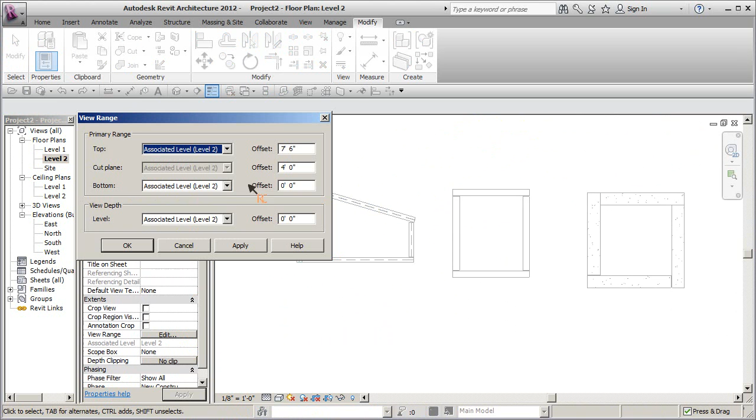So I'm going to go up to my second floor. Probably change my view range here to say unlimited. That way I'll be able to see down a little bit farther. Now what we do is we start our tool here, and as soon as we do, we'll see some options on the options bar here.

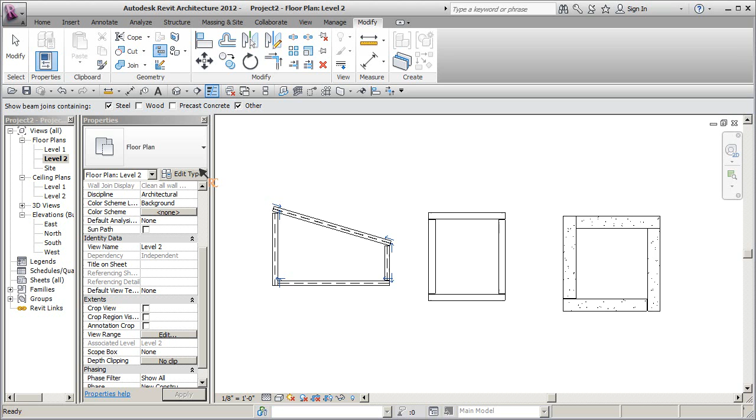And what it says is, show me the steel beam connections, the wood beam connections, and the precast. So if I go over here and I say, okay, I don't want to see the precast or the wood, it just won't show it to me. Now that I'm looking at the steel ones, when you zoom in, this one's being cut back, this one is not.

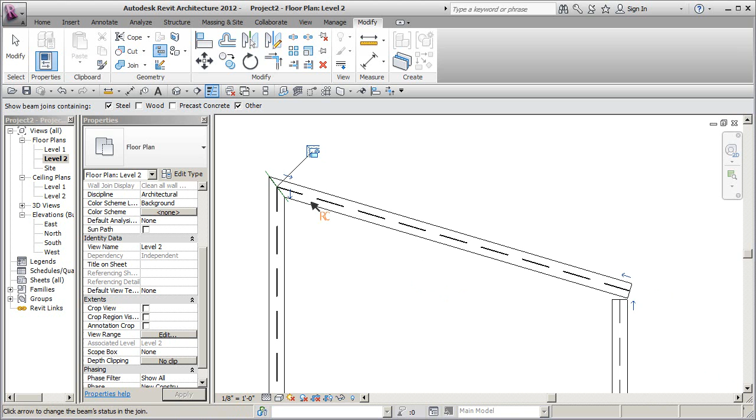So watch what happens when you flip this and it goes in there. Now they're both going away from the joint. Okay, and that's when you get your miter cut. You can basically take these two guys and form whichever connection you want. It's pretty straightforward. This one, if you bring that one back, it cuts back.

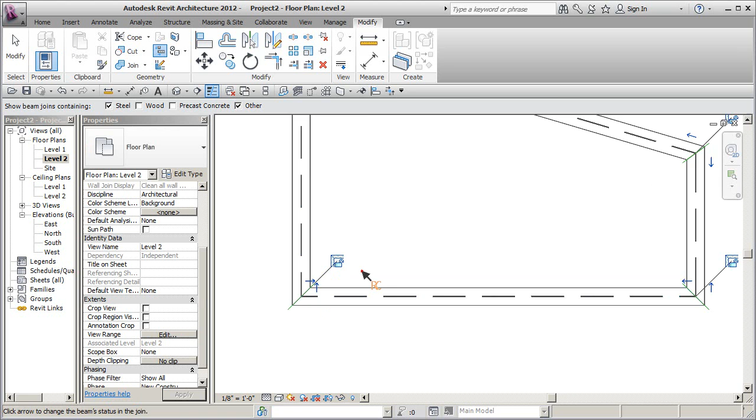If you bring this one in, it goes forward. If you bring them both in, then they form your miter joint. So you can basically go through and form whatever you want. This one's going away. This one needs to flip like this. Now we can say, okay, I only want to see the wood ones, not the steel ones. There's my wood ones. Same type of thing.

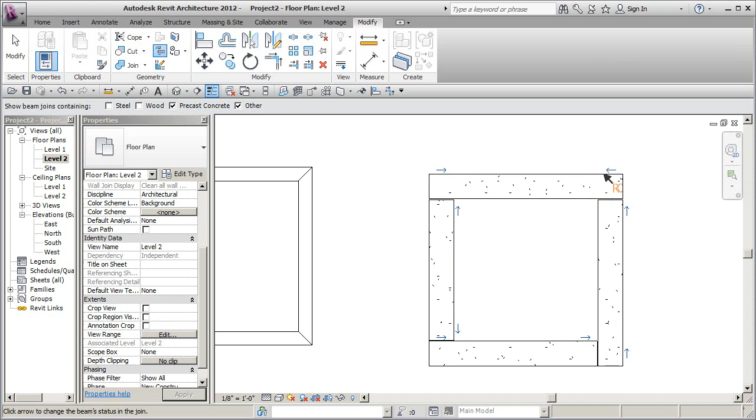It's up to you. It's a little flip arrow, very straightforward, forming those. Precast, maybe we'll leave our precast just like that. Turn the visibility on. Maybe we just want to flip them the other way, just for the halibut. Okay, very straightforward, nothing too fancy. So keep an eye on your options bar here as usual.

And this is a tool specifically for where steel, wood, and precast beams start to come together. Others probably custom families or something. To clear it, escaping doesn't seem to do it all the time. So if you're not sure, hit modify. Clicking Modify here is like doing 3 escapes or so. It's kind of the mothership of clearing your selection and command. So click the modify button and it all goes back.

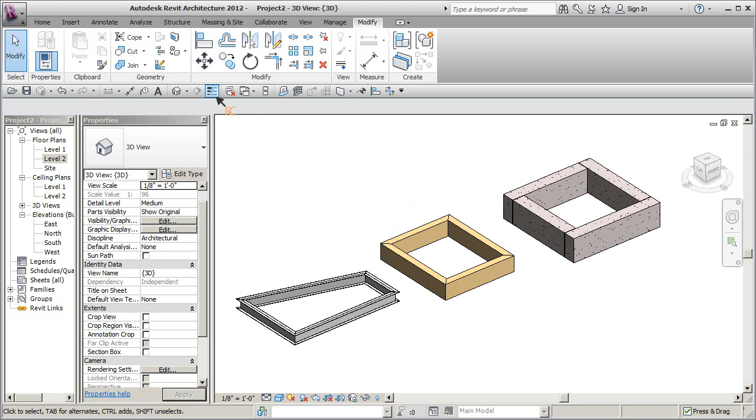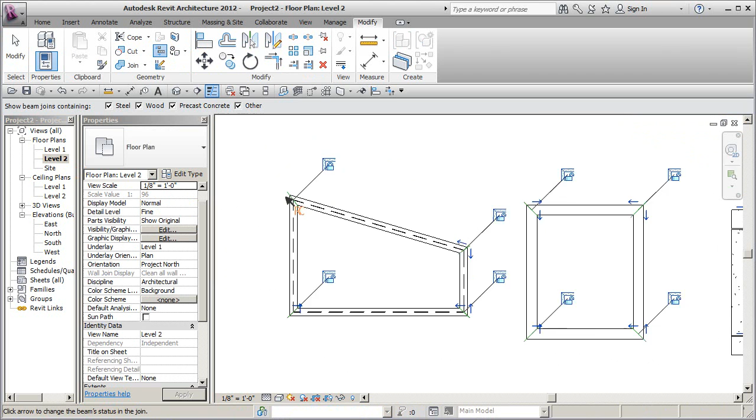So this can be done in a plan view, or clearly, as we see, it can be done in a 3D view. If you lock it, then that means that you won't get the little flip arrows. This one you'll still see the flips, even though they're a bit small. When you lock it, the flip arrows go away. If I go back and start my beam joins again, you'll see that this one is showing the miter cut and it's locked. I'd have to unlock that to bring it back. So nice and straightforward, connecting beam joins.

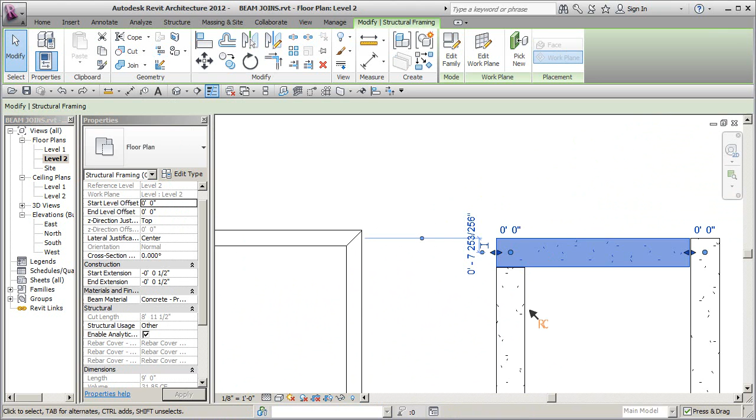And one last point on when beams are connecting here. Let me just go back to the second floor. If you pick on a beam, you'll see this kind of dot, control grip. If you click on here, you'll see one too. If you pick both of them at the same time and that grip turns into a hollow circle, that means that they are sharing a common node, which is important when you're dealing with these connections.

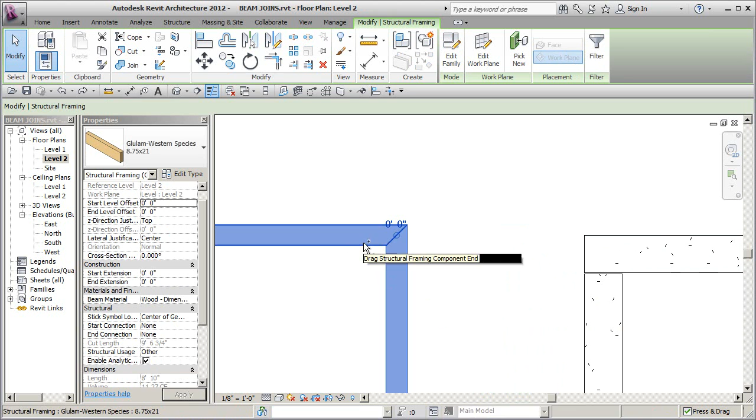Okay, so if you pick on here and you pick on here and that center one turns into a circle, then that means that that's a common point and is going to work better with your beam joins. And that goes for when all beams connect. If you click here and it turns into this hollow circle, then that means that you have a common point.

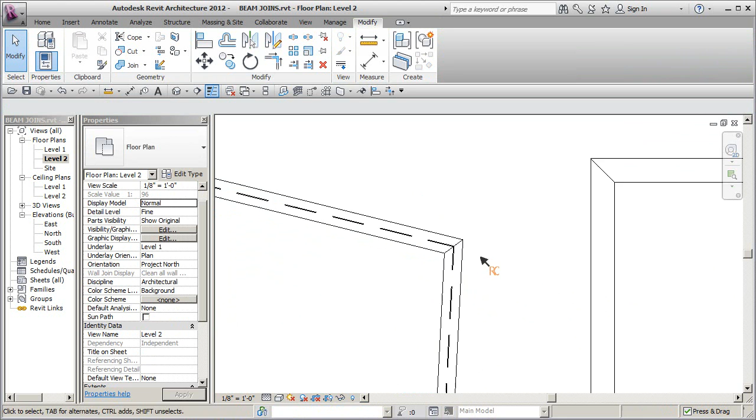And that is where you know your beams are talking to each other, and that's where your beam joins is going to work best, because they have to be talking to each other in order to do that. So click both at the same time and have a look for that little hollow common component end grip.